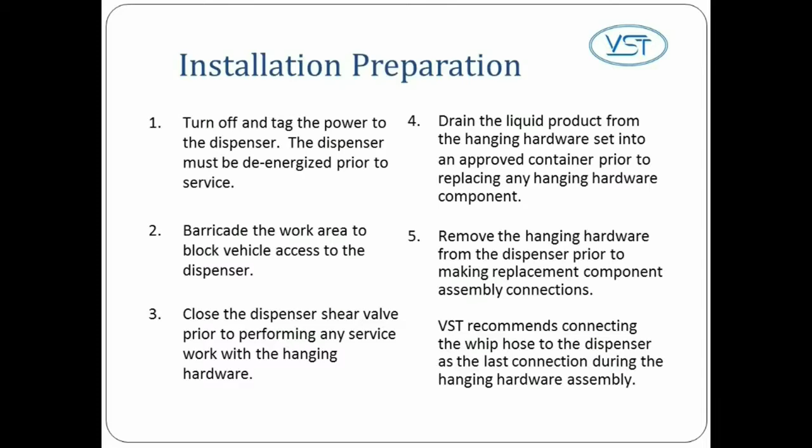Number 4, drain the liquid product from the hardware set into an approved container prior to replacing any hanging hardware component. Number 5, remove the hanging hardware from the dispenser prior to making replacement component assembly connections. VST recommends connecting the whip hose to the dispenser as the last connection during the hanging hardware assembly. If any of the hanging hardware components are involved in a drive-off or incur other customer abuse, each individual component must be functionally tested prior to customer dispensing activities.

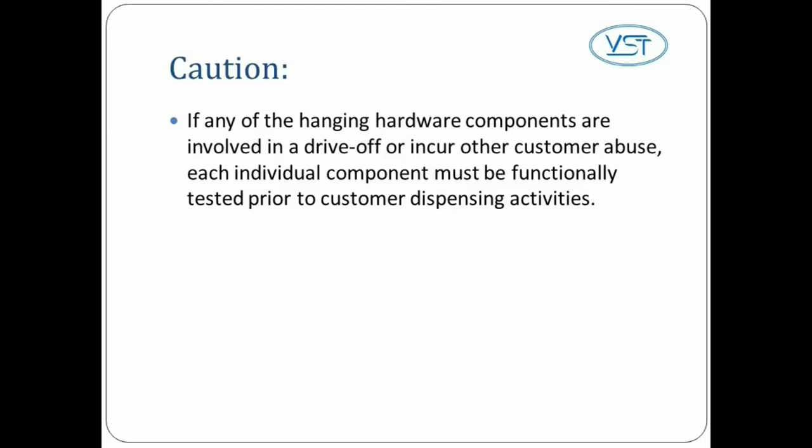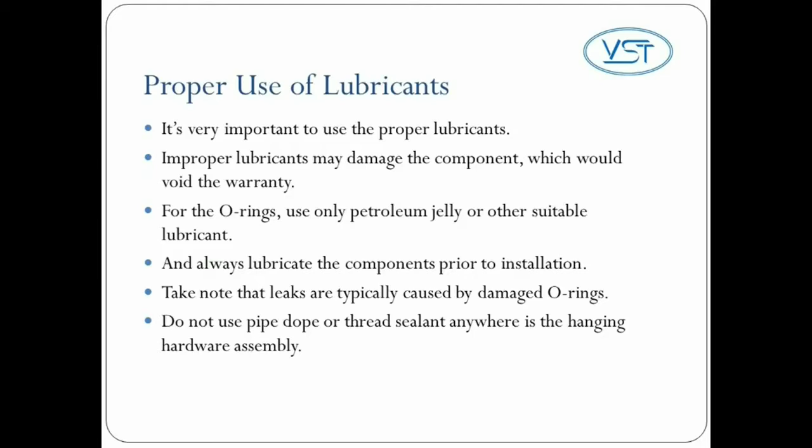It's very important to use the proper lubricants. Improper lubricants may damage the component, which would void the warranty. For the O-rings, use only petroleum jelly or other suitable lubricant. And always lubricate the components prior to installation. Take note that leaks are typically caused by damaged O-rings. Do not use pipe dope or thread sealant anywhere in the hanging hardware assembly.

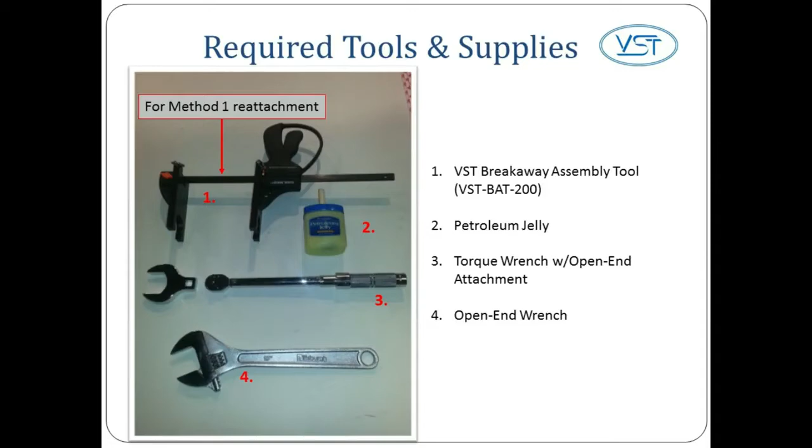Here are the tools and supplies you'll need. 1. A VST Breakaway assembly tool, part number VST BAT200. 2. Petroleum jelly. 3. A torque wrench with an open-end attachment. And 4. An open-end wrench. Let's begin with installing the VST EVR Assist Breakaway. Once you know the dispenser is secure, you can then begin to install the breakaway.

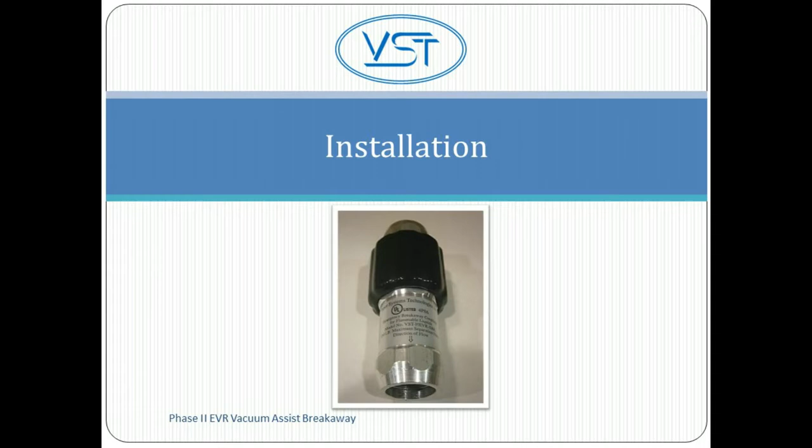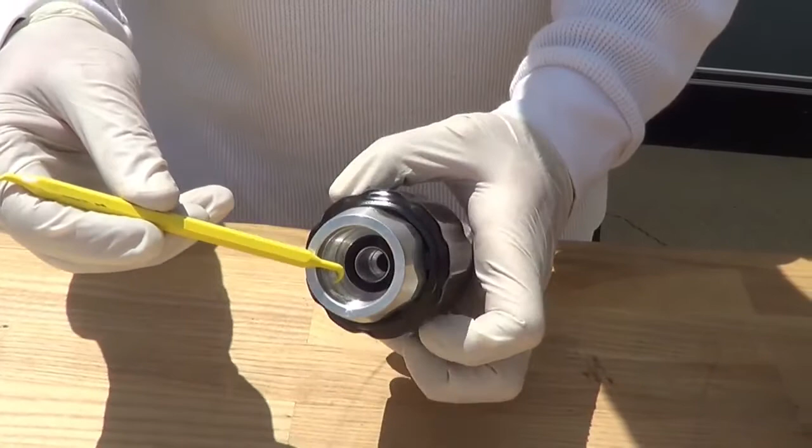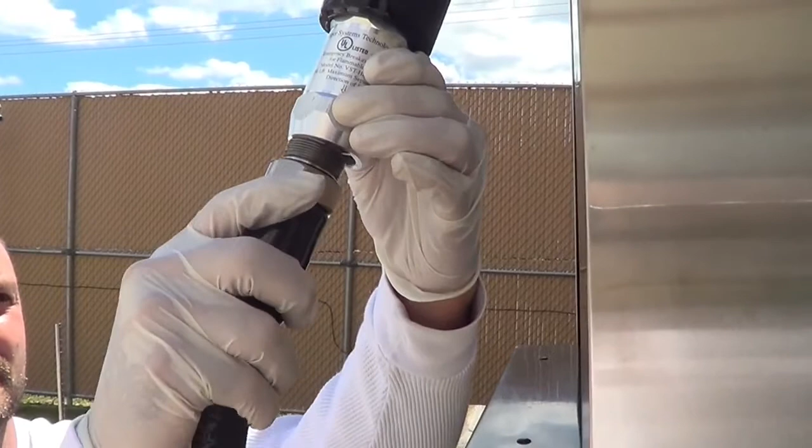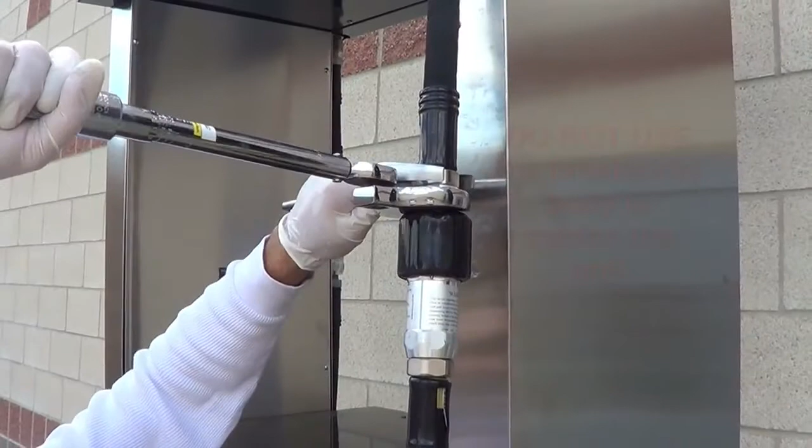Anytime you replace or repair a component, you must perform these 3 tests to make sure the component is functioning correctly. 1. A leak test. 2. A nozzle shutoff test. And 3. A resistance test.

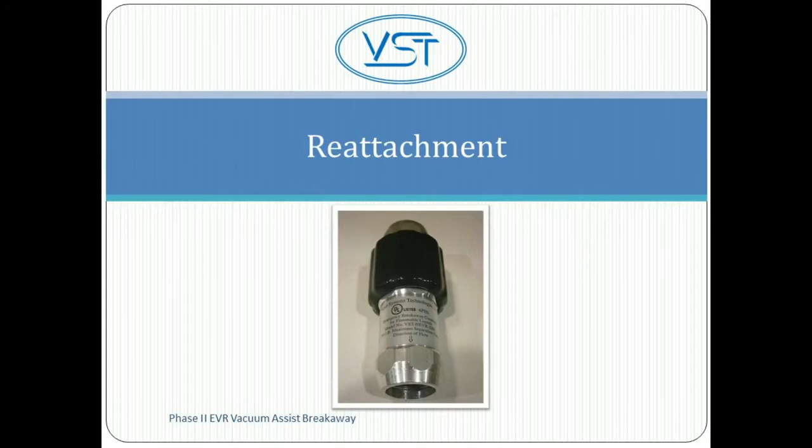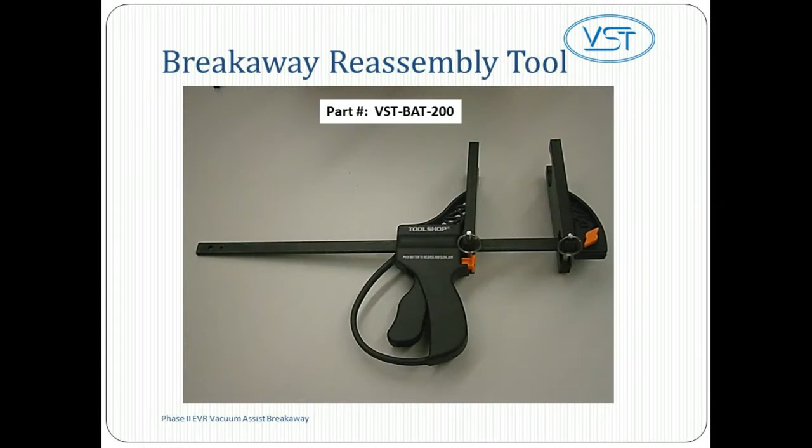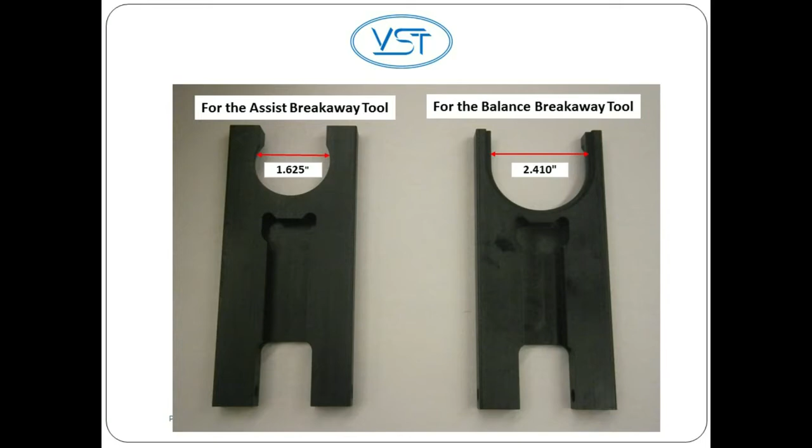Now let's look at how to reattach the VST EVR Assist Breakaway. There are 2 methods for reattaching the VST EVR Assist Breakaway. Method 1 is by using the VST Breakaway Reassembly Tool, and Method 2 is without the use of the VST Breakaway Reassembly Tool. Let's start with Method 1, using the VST Breakaway Reassembly Tool. Use the VST Breakaway Reassembly Tool with the appropriate reassembly plates to reassemble the breakaway. The tool is used to provide appropriate leverage for the ease of reassembly of the breakaway. This reconnection process can be done without disassembling the hoses from the breakaway halves.

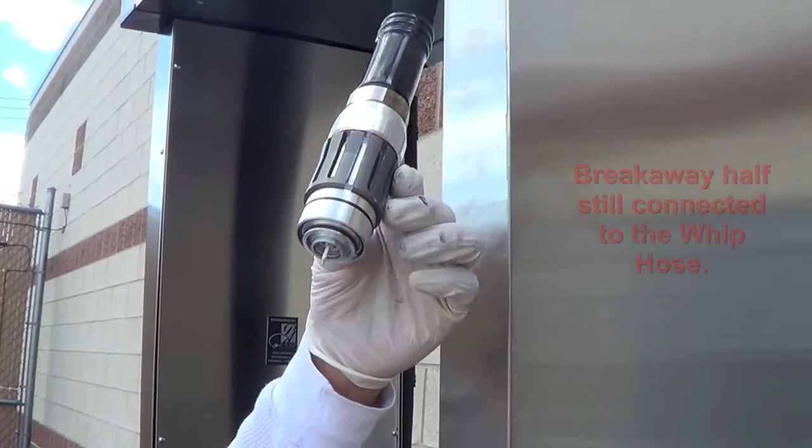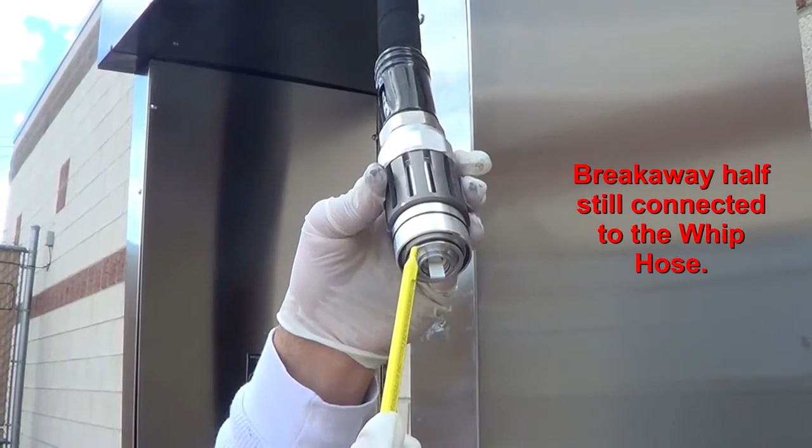Inspect both safety breakaway halves for damage that may have occurred during separation. Look for things like external damage to the product, damaged threads, damaged O-rings, missing O-rings, proper placement of O-rings, etc. If damage is detected, replace the damaged breakaway with a new one.

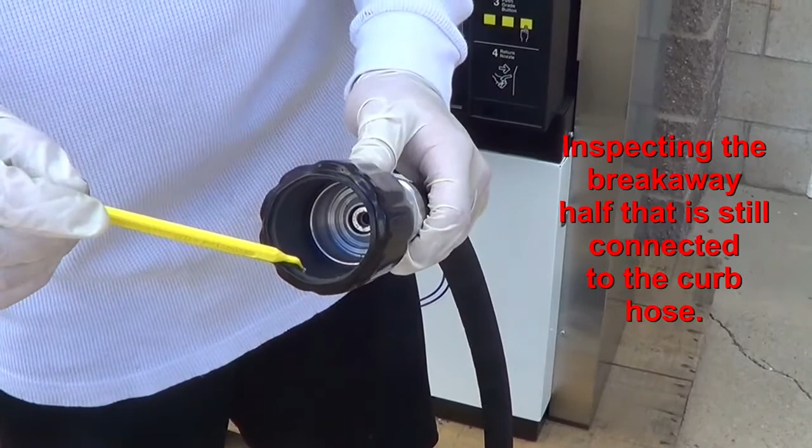After inspecting both breakaway halves, inspect the mating connections to make sure they are undamaged and clean. Lightly lubricate all O-rings on the mating connections with petroleum jelly or other suitable lubricant.

Press the button on the VST breakaway reassembly tool to spread the end clamps apart. This will allow for the two separated breakaway halves to fit between the top and bottom clamps.

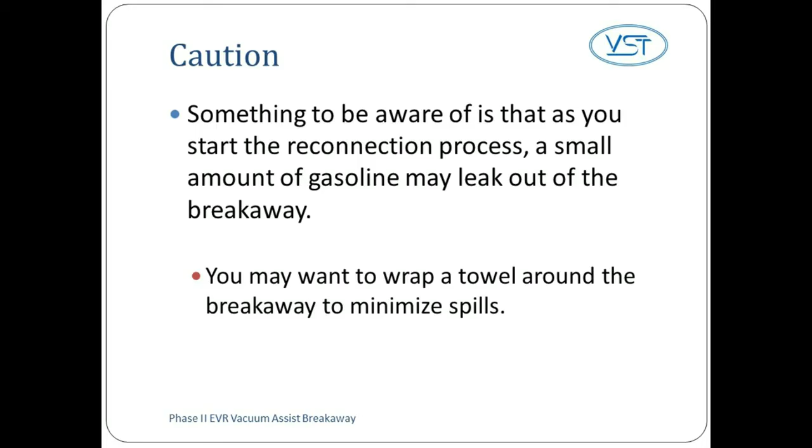Something to be aware of is that as you start the reconnection process, a small amount of gasoline may leak out of the breakaway, so you may want to wrap a towel around the breakaway to minimize any spills. Slide the top clamp of the VST breakaway reassembly tool behind the hex on the breakaway half that is still connected to the whip hose.

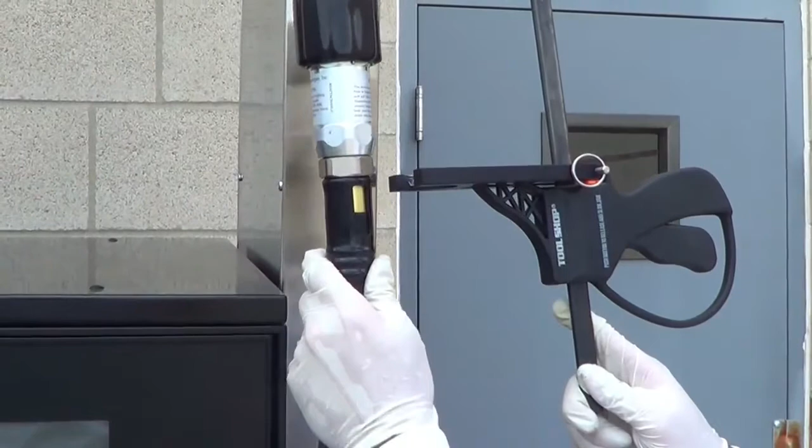Slide the separated bottom half of the breakaway with the curb hose and nozzle attached onto the bottom clamp of the VST breakaway reassembly tool. Slowly squeeze the VST breakaway reassembly tool trigger to bring the breakaway halves together.

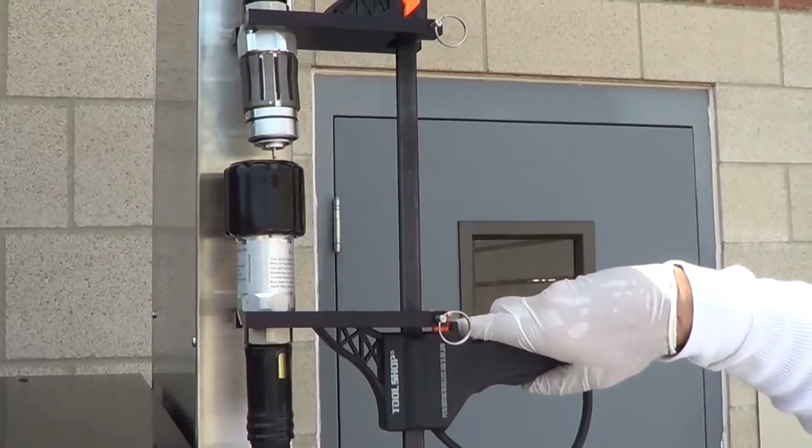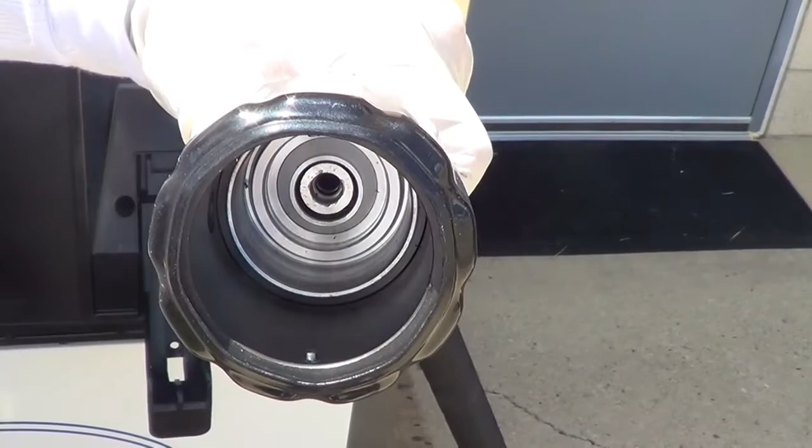Here is a close-up look of how the two halves align. Notice for teaching purposes we're showing you this close-up with the two halves detached from the hoses. Remember, you'll be doing this alignment with the halves attached to the hoses. The two aligned breakaway halves need to be assembled concentrically, meaning properly aligned, until they snap into place.

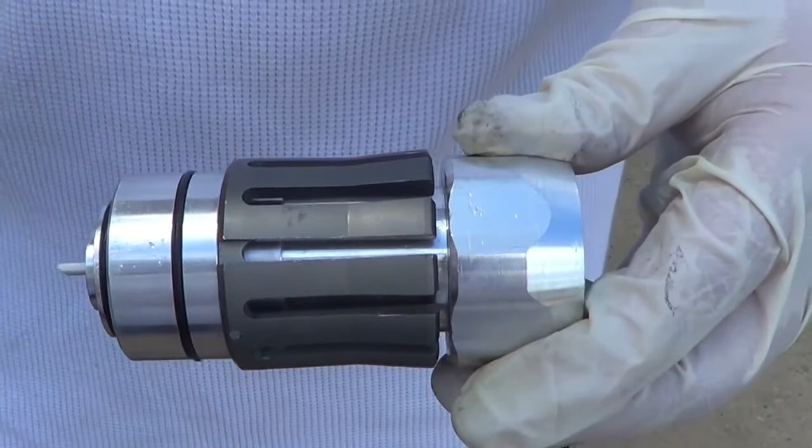Carefully align the two breakaway halves. Align the two anti-rotation studs inside the breakaway half on the curb hose with the two slots on the other half of the breakaway attached to the whip hose.

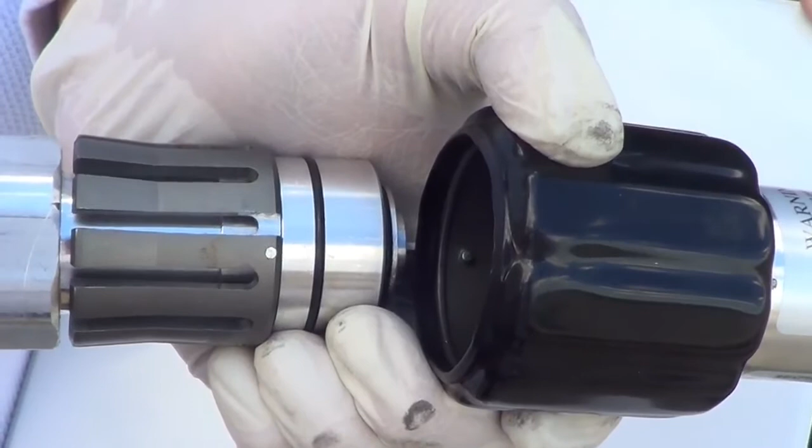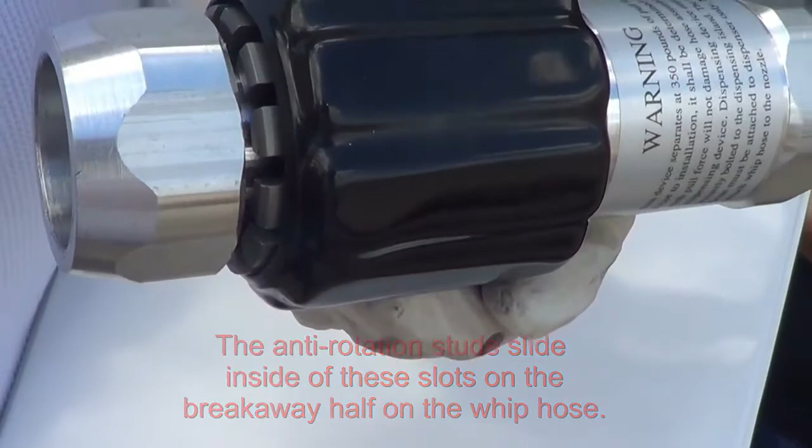Continue squeezing the VST breakaway reassembly tool trigger to finish the reassembly. Listen for a click to indicate that the two have been properly reattached. If the two breakaway halves have become cocked or misaligned or otherwise do not snap together easily, pull them apart and start the process over, starting with attaching the VST breakaway reassembly tool to the breakaway half attached to the whip hose.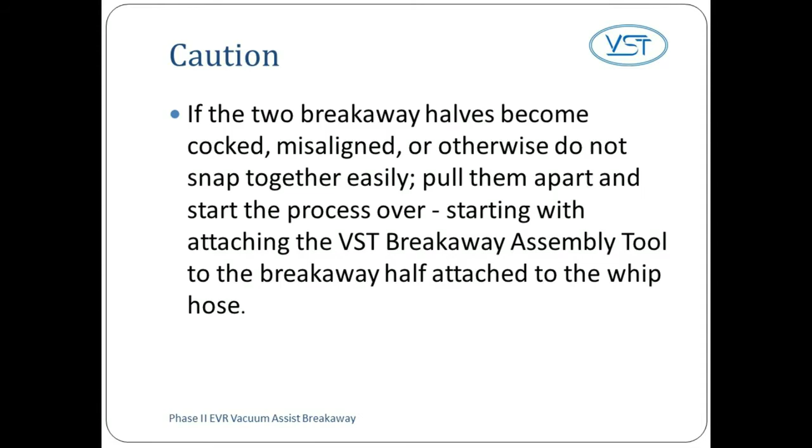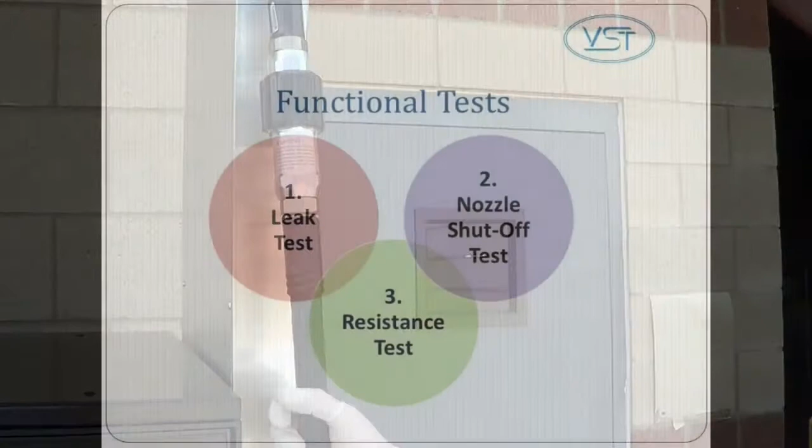After the two breakaway halves are properly snapped together, remove the VST breakaway assembly tool by pressing the button on the tool to release it. Then give the reassembled breakaway a strong pull to verify that it is properly connected. Now conduct the functional test to confirm the quality of your breakaway reattachment.

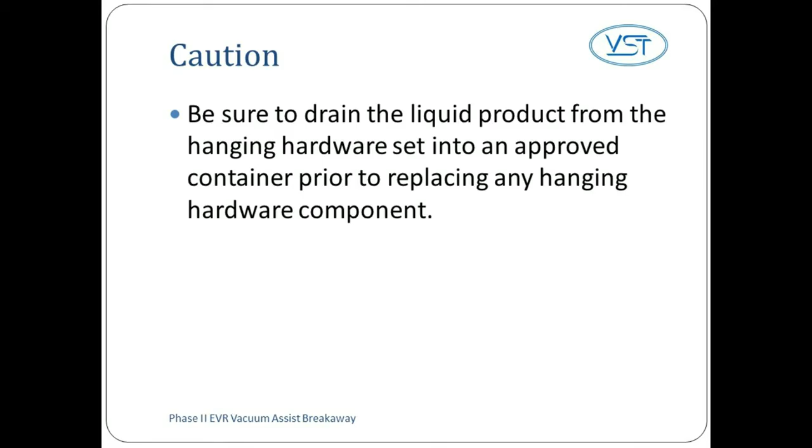Now the instructions for method 2, reassembling the VST vacuum assist breakaway without using the VST breakaway assembly tool. Be sure to drain the liquid product from the hanging hardware set into an approved container prior to replacing any hanging hardware component. Disconnect both the whip hose and the curb hose from the safety breakaway halves.

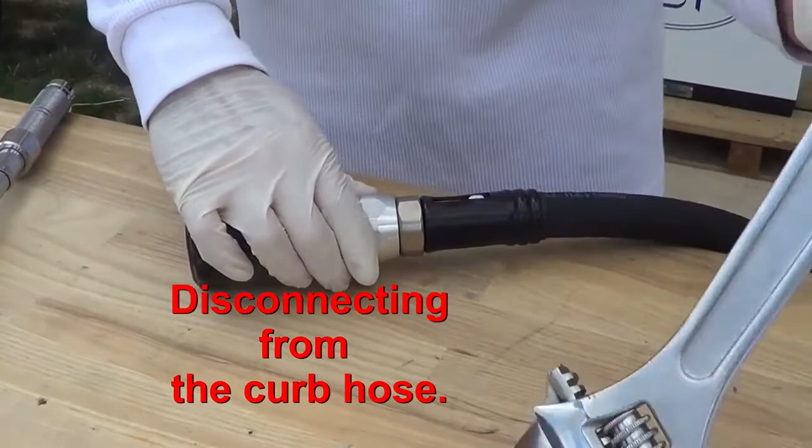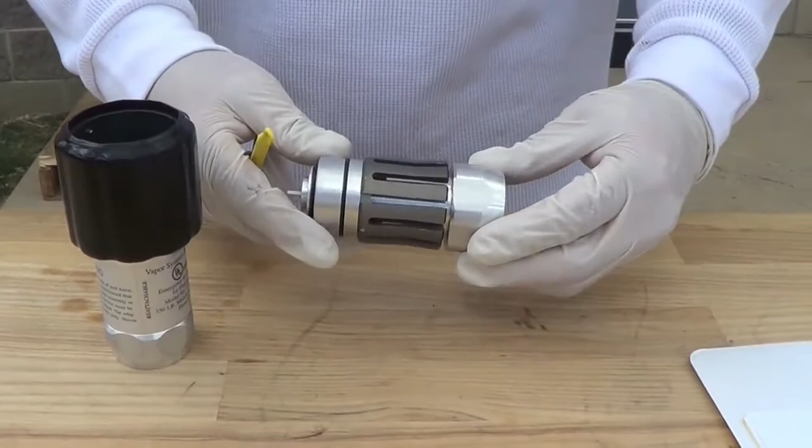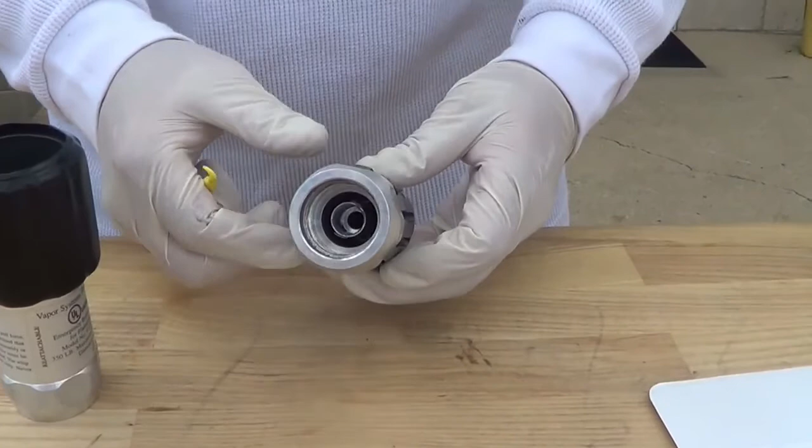Inspect both safety breakaway halves for damage that may have occurred during separation. Look for things like external damage to the product, damaged threads, damaged O-rings, missing O-rings, proper placement of O-rings, etc. If damage is detected, replace the damaged breakaway with a new one.

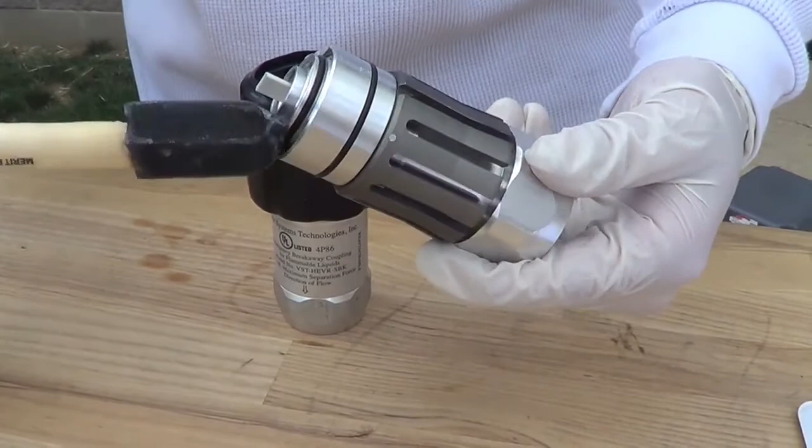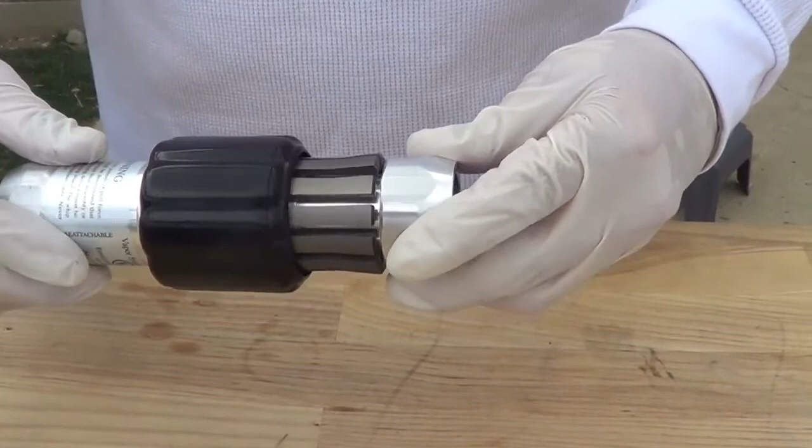After inspecting both breakaway halves, inspect the mating connections to make sure they are undamaged and clean. Lightly lubricate all O-rings on the mating connections with petroleum jelly or other suitable lubricant. The two aligned breakaway halves need to be assembled concentrically, meaning properly aligned, until they snap into place.

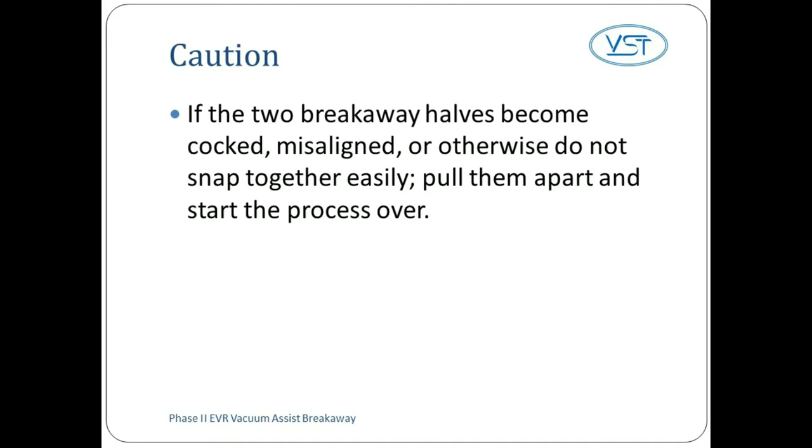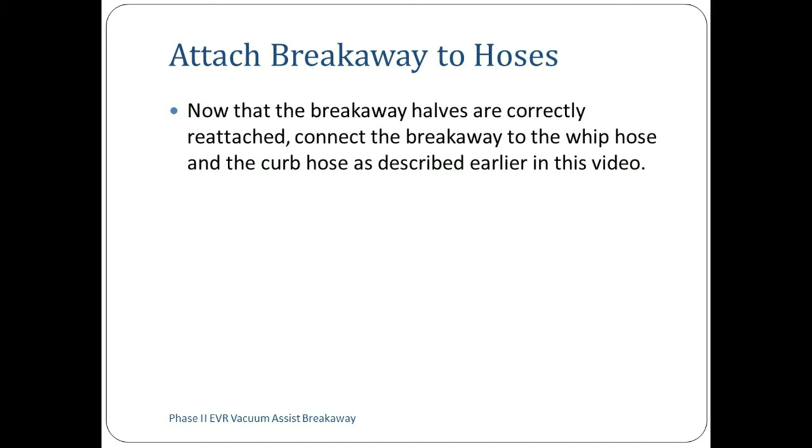If the two breakaway halves become cocked or misaligned or otherwise do not snap together easily, pull them apart and start the Method 2 process over again. Now that the breakaway halves are correctly reattached, connect the breakaway to the whip hose and the curb hose as described earlier in this video. Now conduct the functional test to confirm the quality of your breakaway reattachment.